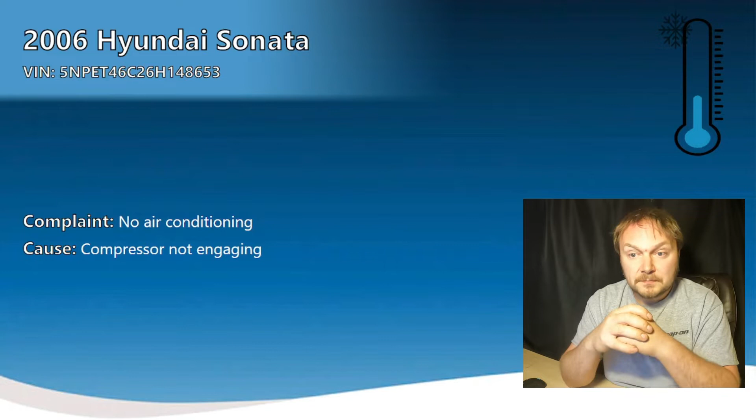Moving forward, usually what I start with is just activating the controls to see if we can hear the compressor clutch kicking in. So we'll just push the button. From the video, being inside the car, it'd be pretty hard to hear if the clutch was kicking in, wouldn't show up on video well. In the car, you would hear it, the click, the whine of the engine as it drags down a bit. In this case I didn't hear anything, but we did see the AC light kick on as I pushed the button, so at least we knew that part was working, and we'll carry on.

With air conditioning, I find the number one reason it doesn't work is just low refrigerant. It leaks out naturally over 8 to 10 years or so, that's considered normal. Otherwise a rock might hit the condenser or a line, something happens and it just kind of leaks out. But number one cause, low refrigerant. The second cause of air conditioning not working, I find, is faulty compressors.

So now we need to go out and hook up the gauges, give it a quick look. This is with the vehicle running. Here on the low side is 90 psi. On the high side, a bit hard to see with the glare, this is 100, this is 50, so we're just below 90, maybe 80 or so psi.

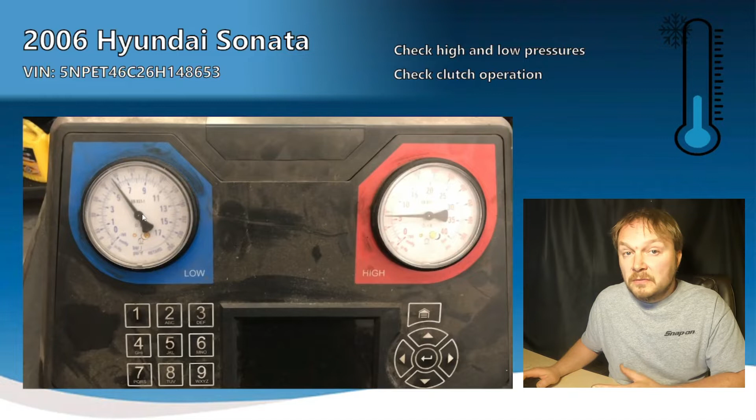We see both needles are stationary, not moving at all, so we know that means the compressor is not pumping anything. These pressures would be more than enough to allow the compressor to operate. That's not necessarily to say we couldn't have a control issue, but we do know there's more than enough pressure in the system that if everything else were working fine, the compressor should be kicking in.

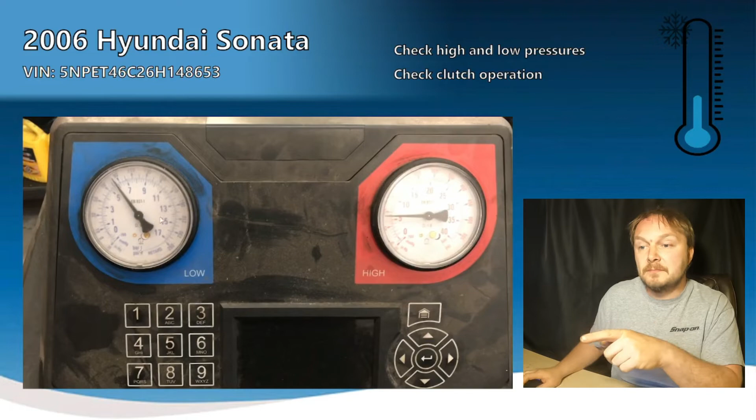We don't know if that's enough for a full charge. Once we fix the compressor issue, we'll do a full evac and recharge service to bring it up to the proper level. We don't want to fix a bad component and then three months later have the AC blowing warm because it was low anyway. We'll top it up once it's done, but we know our AC charge is not the issue, there's enough in there, it should be kicking on. So we'll go around and take a peek.

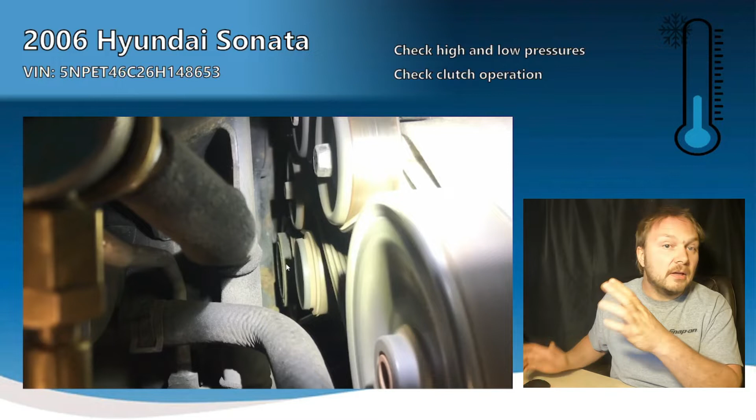So right here is the face of the compressor. The hub that's splined to the input shaft of the compressor is not turning with the pulley. As we saw, our pressures are stationary, they're not moving, so we know the compressor is not moving. In a normal working system with the compressor turned on, you'll see that face move, but it's not. So we'll carry on.

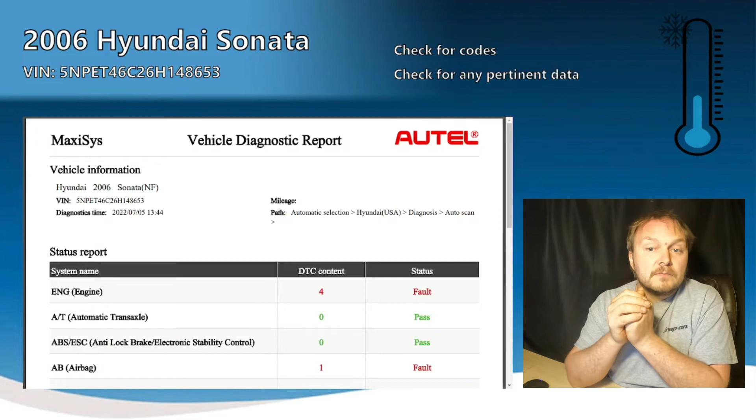Quickest thing to do on these, I'll usually scan the codes. Being an '06, it's unlikely to find anything necessarily pertinent on the scan tool, but as I'm starting the vehicle and going around... I'll hook up the scan tool, start a code scan, and come back to it once it's finished.

We look, shush. I was just trying to make a video.

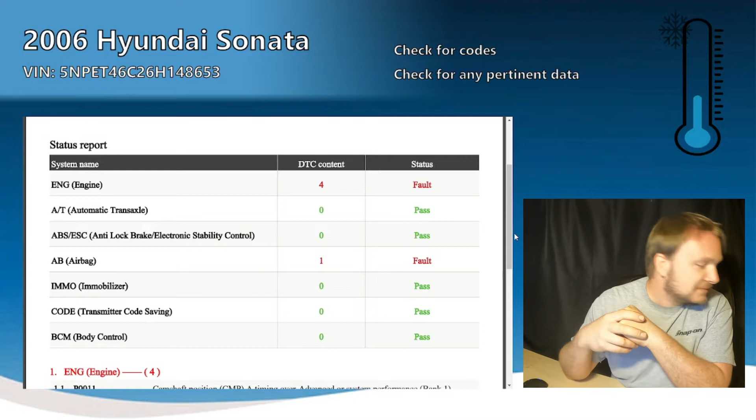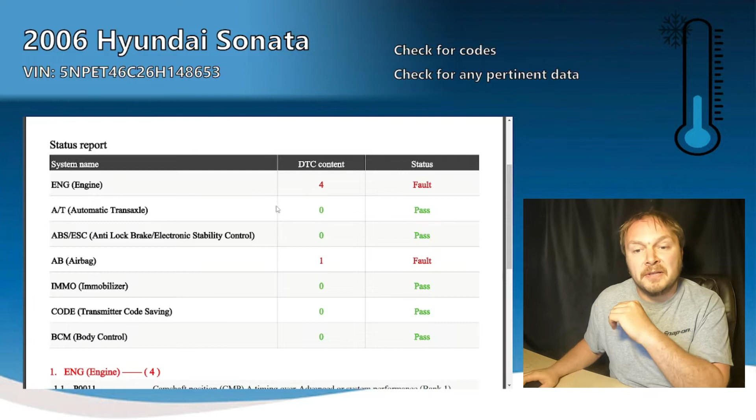So on the list of modules, we don't see an HVAC module. If we don't see an HVAC module, it's very unlikely to see any data at all that's going to help us out. But I'll just give it a quick look at the codes.

Looking at the codes, sure enough, we don't see anything relevant. We do see a bunch of interesting codes, but it's had a bad battery in it, so none of those have anything to do with the air conditioning. So we'll move on. But I always like to check codes because you never know if you have a control circuit issue or something. It doesn't take very long to give it a quick scan, but we don't see anything, so we move on.

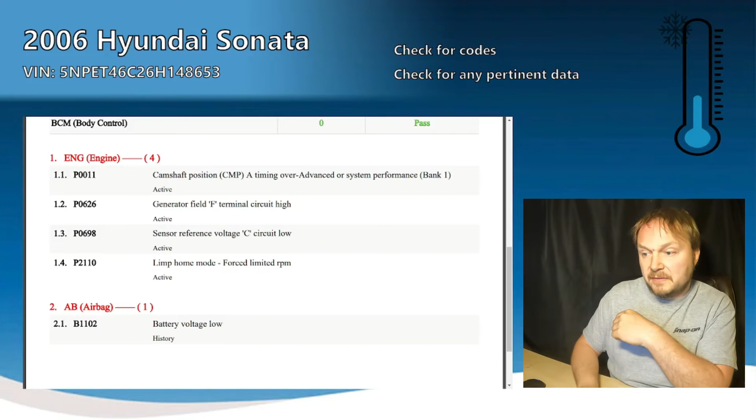What I'll always start off with is the wiring diagrams. I find it's the quickest way to get the full picture without going through a whole bunch of really wordy flow charts. I'll just look through the wiring diagram for the HVAC circuit.

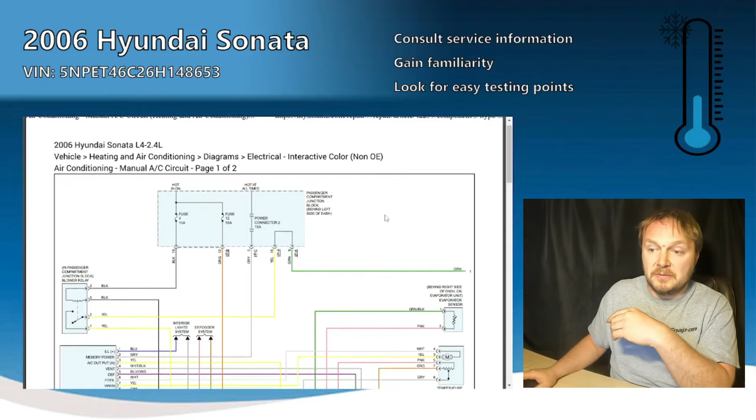In this case, since the compressor is not turning on, I'll start by finding the compressor. So I'll start looking through anything that says compressor. We go down to this page, we go down, and here we are - AC compressor, top front of engine.

So the symbol at the bottom means it's case grounded. Being case grounded, since it has such a large mounting surface, your case ground is going to be fine. The vehicle starts and runs, so we know there's no main block ground issue, otherwise the vehicle wouldn't start. So we won't have to worry about a ground in this case.

Some might have a separate ground. This one does not, just has a single wire. So that will be our power feed going to the coil that creates the magnetic field that locks the hub to the pulley. We'll follow that back, and it comes up, up, up, straight through to the air conditioning relay. So there's nothing in between.

So all I'm going to do is try and find the AC compressor on the vehicle. Hopefully it's accessible, and I'm just going to go straight here and see if I've got power there.

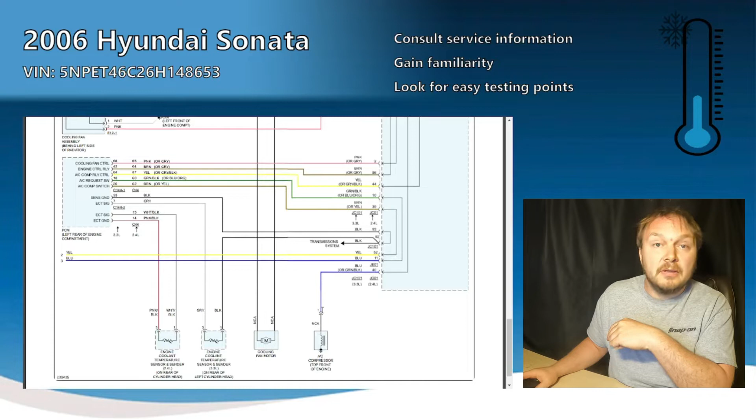And here's our compressor. It is accessible on this vehicle, thankfully. So I'm just going to peel back. There's a little bit of plastic on the end, on these Hyundais, on the end of the connector. There's a plastic shell over the connector.

I just pop it off, and then it exposes the wire nicely, and I can put either a back probe or a piercing probe on there. If I put a piercing probe, I always go through it afterwards and clean it up - you don't want an exposed wire. But yeah, I'm just going to tie into that circuit right there and see if I have power.

So we got two different options. We can either use the vehicle itself, fire it up, turn the air conditioning on, or in this case, I'll use a scan tool to command the air conditioning relay on, the AC compressor relay on. Going back to that wiring diagram, if we turn on the air conditioning relay, it should directly send power down to that compressor.

By doing this method, I don't have to worry about belts spinning, the noise of the engine, any of that stuff. However, I do have to keep in mind we are using a scan tool, so there's an extra variable there. I'm pushing a button on the scan tool, assuming that scan tool is programmed properly, that it will properly pass that command on to the vehicle's engine computer, and that engine computer will understand that message, agree with it, and allow that command to pass on.

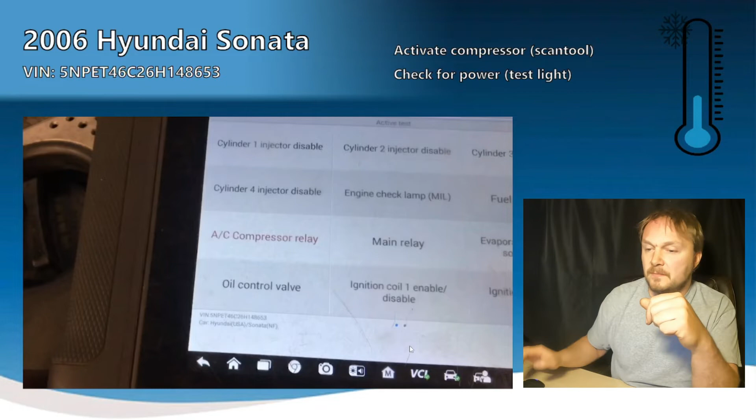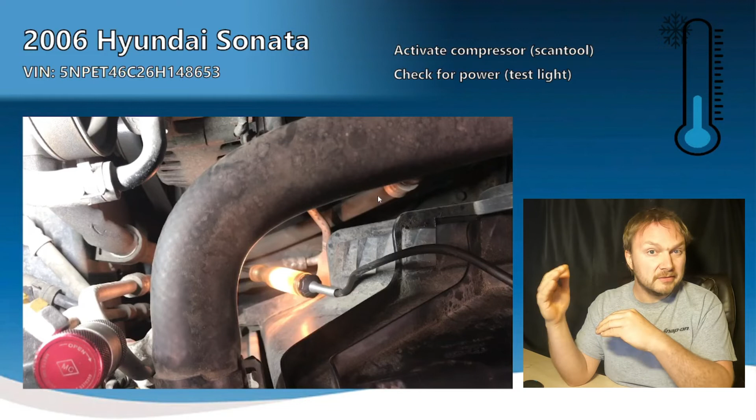So we'll go in the test, we'll hit the start, and we see our test light blinking on and off. Some of these tests, when you turn them on, send constant power. Some will just do a toggle mode, on off, on off, on off. That way, under toggle mode, you can kind of see if the relay's able to open and close consistently rather than just a solid time. So if you see your test light blinking on and off like this, that's just going to be your scan tool. But we do see that there's power making it down there.

So really at that point, that's pretty well good enough. You need a compressor. It has everything it needs. It's not turning, it's all integral to the compressor. We don't really get clutches anymore. You got a problem with that, you sort of get the whole compressor. If this were your own car and it's hard to get a compressor or it's really expensive, and you had the time to look online for just a clutch and a coil, yeah, you could replace it.

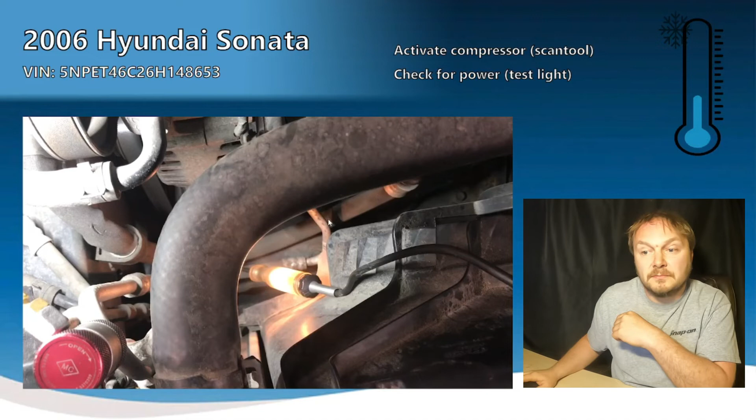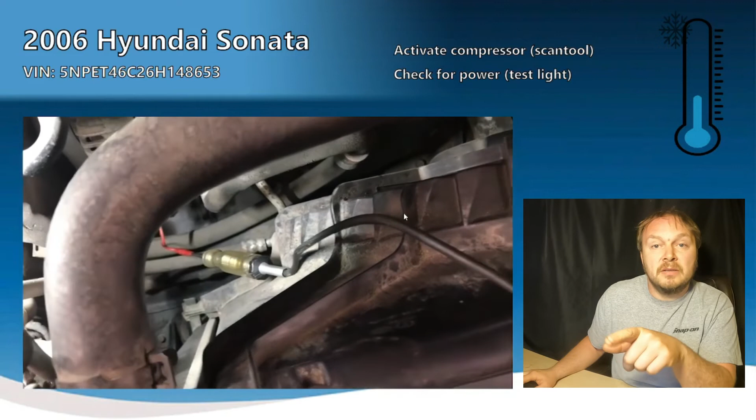But there's one other thing we'll do that I like to do. We'll shut the test off, wait for the test to finish. So now that side of the circuit is turned off, the power side will just be an open circuit. So I'll take my test light that was on battery negative, because we were looking for power, and I'll now move it over to battery positive. And we look at our test light, and our test light is not lighting.

Now, normally this test light should be lighting right now, because let's think about that. The compressor relay is off, but the other side of that coil is attached to a full-time ground. So our test light should be reading that full ground through the coil windings. Because it has to go through the coil windings, the test light might be a little bit dimmer, but that test light should still light.

The fact that it's not lighting tells us we have an open circuit in the coil. It can't send power through. So just a quick little thing makes us feel even better that we do, in fact, have a bad compressor. Nothing to do but pull out the refrigerant and change that compressor.

It's getting to be summertime, so yeah, I ended up doing 3 compressors that day. Some days it's just the same job over and over and over.

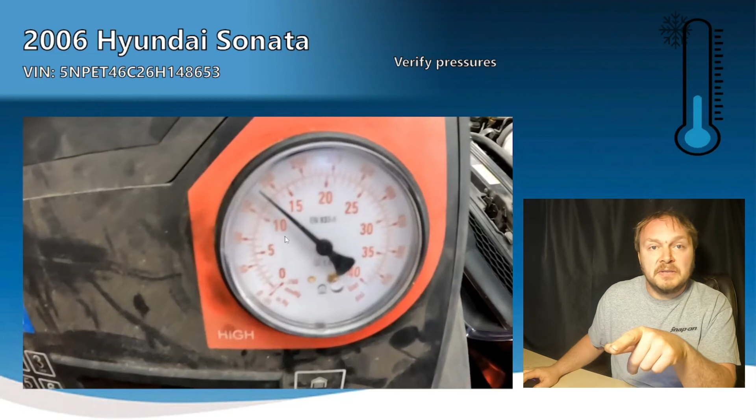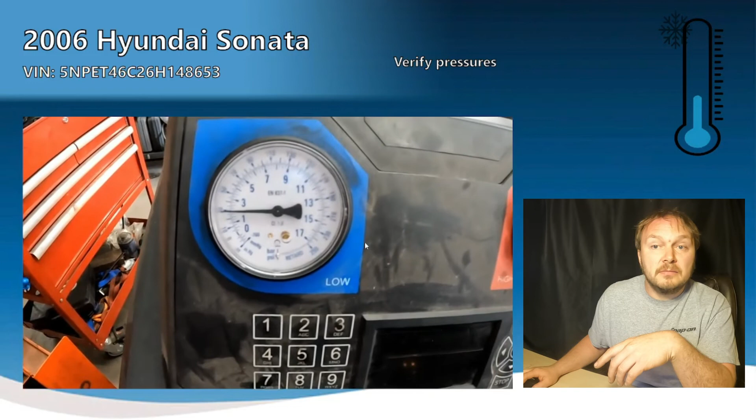So we're running the vehicle right now. Our high side is here at 150, here at 200, so it's around 180 or so. Our low side is right at 30. You'll notice our needles are staying perfectly steady.

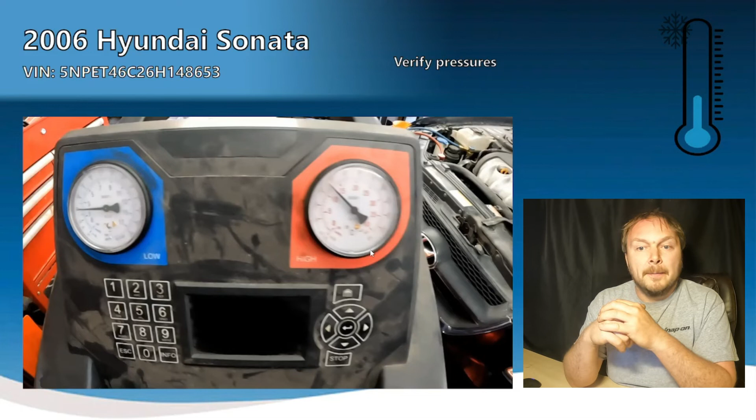There are 2 different types of compressors: the old school cycling clutch style, and the new style. Pretty much every vehicle out there nowadays is the new style, a variable displacement compressor, usually with some kind of metering valve in there. On a variable displacement, you'll see both needles perfectly steady, usually the low side right around 30 psi, and the high side anywhere from 150 to 250 or so, depending on temperature.

Usually on these the low side doesn't change too much depending on outside conditions, atmospherics, and stuff. Usually it's just the high side. But still, these are good readings, you'll see that they stay nice and steady.

If it were an old style cycling clutch, they didn't have metering controls. The compressor didn't have the capability of varying its output, so it was an on-off system. The compressor would kick in, the low side would go down as the high side would come up, and then once they reached too much of a threshold, the compressor would kick off, they'd come back closer together, then the compressor would kick on again, and it would just go over and over and over.

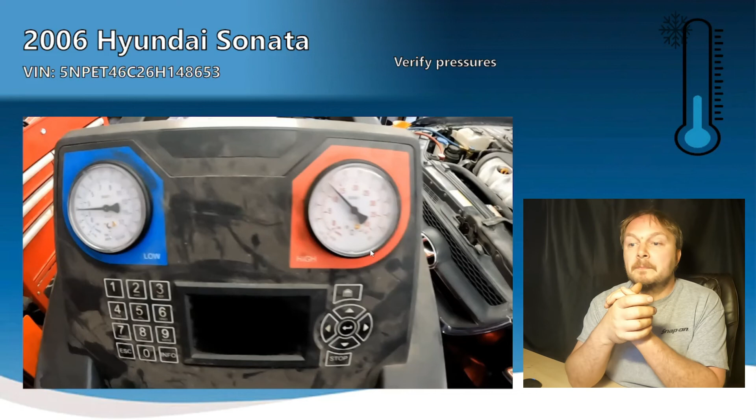Variable displacement, you see them nice and steady, just like this. Just to confirm, we'll take a peek down there with the new compressor, and we can see the front face of the compressor is turning. So the hub is pulled in and is being locked, the clutch is being locked to the pulley, so that is in fact turning the shaft.

If we go back to our pictures here, our compressor on the left - when I went out to look at that vehicle to find out why it wasn't working, usually what I'll do is a quick 5-second test: just grab that front face and see if I can turn it. You won't be able to turn the inner part because the belt's on, but the front face should turn. If you can't turn it when the vehicle's off, then you know that compressor is seized. So I tried that on this one, and the hub just came off in my hand.

You can see right here, there's the pulley, which will be either type, just freewheeling with a belt. It's attached to this hub here, the face, and the hub goes on the outside. The hub is just like a pressure plate in a standard clutch, spring loaded, with its tension pulling out. As soon as power goes to that coil, it creates a magnetic field, pulls it in, slams the two together, and then they both turn as one, turning the shaft on the inside, which actually turns the compressor, and then the compressor can start doing its pumping.

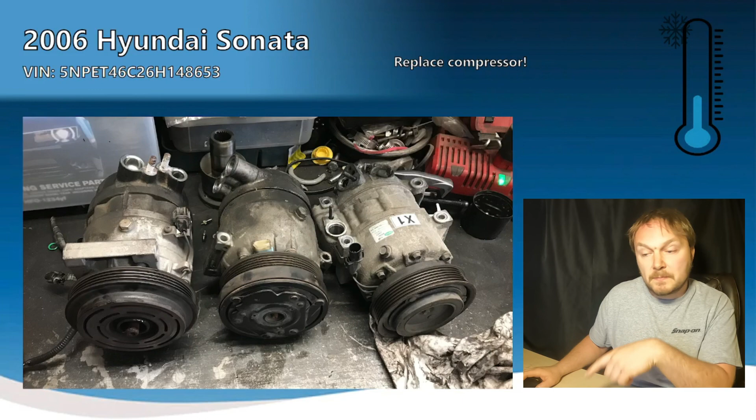Back with our replacement, we take a peek down there, we do see it is in fact turning, and of course it is blowing nice and cold. This one was nice, quick and easy, and that's all there is to it.

For a lot of these, you just go after the common cause. If you can, go straight down to that compressor, see if you've got power. No sense checking relays, no sense swapping relays, checking fuses, any of that sort of stuff. If you see power down on that compressor, it's that simple - you need a compressor.